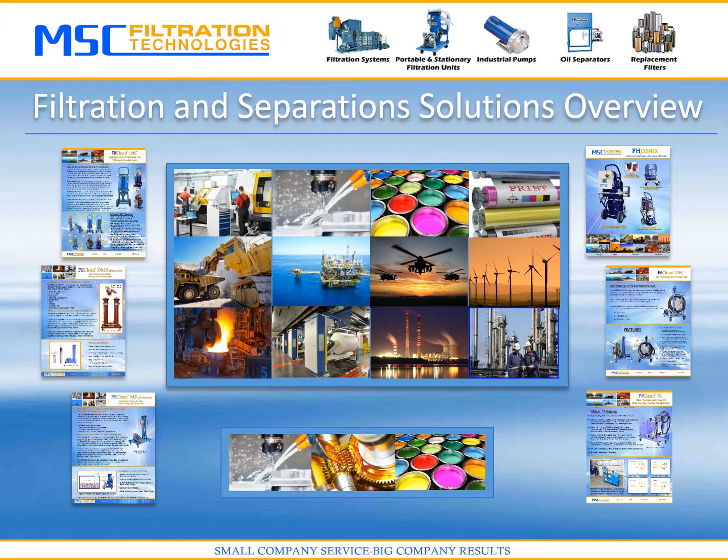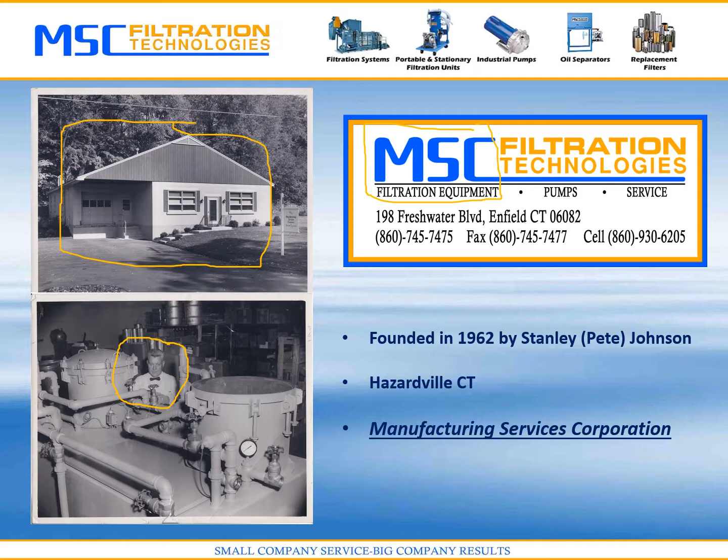Our company was founded in 1962 by Stanley Pete Johnson, and our original office was located in Hazardville, Connecticut. The original name of the company was Manufacturing Services Corporation, and that is what the MSC stands for in MSC Filtration Technologies today.

Today we're located in Enfield, Connecticut in an 8,200 square foot building where we manufacture, warehouse, sell, and engineer our products.

MSC designs, engineers, and manufactures a variety of fluid filtration and handling equipment for a variety of applications and industries. The primary industries we sell to are machine tool, lube and hydraulics, and process industries. Our products reduce waste, improve fluid cleanliness, increase equipment reliability, and improve working conditions.

On the left, you'll see some of our standard offerings, which include our FilClean line of filter carts, which can be used in a whole host of different industries and applications. Our Tramp oil separator, which is primarily used in the machine tool industry for removing oil from machine tool coolant.

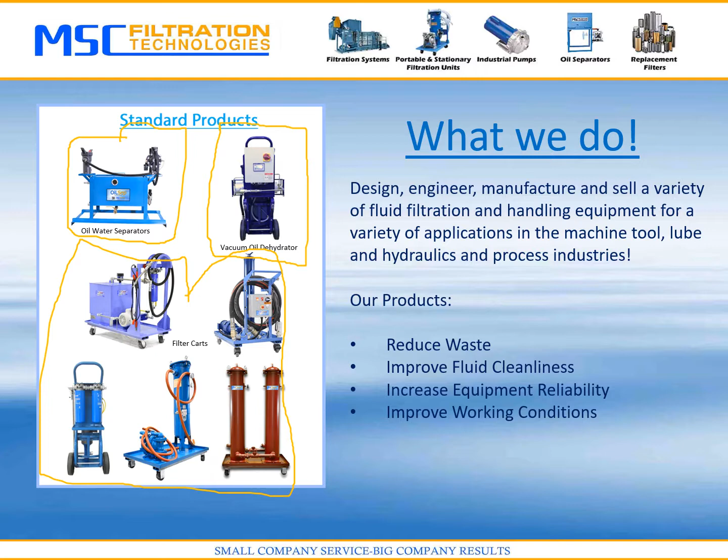And also our Phoenix membrane vacuum oil dehydrator, which is primarily used in the lubrication and hydraulic market for removing water from contaminated oil systems. This is built exclusively by MSC Filtration Technologies.

In addition to our own product lines, MSC also represents and distributes a variety of complementary fluid handling and filtration product lines, including industrial fluid chillers, fluid pumps, vacuum systems, and magnetic filters.

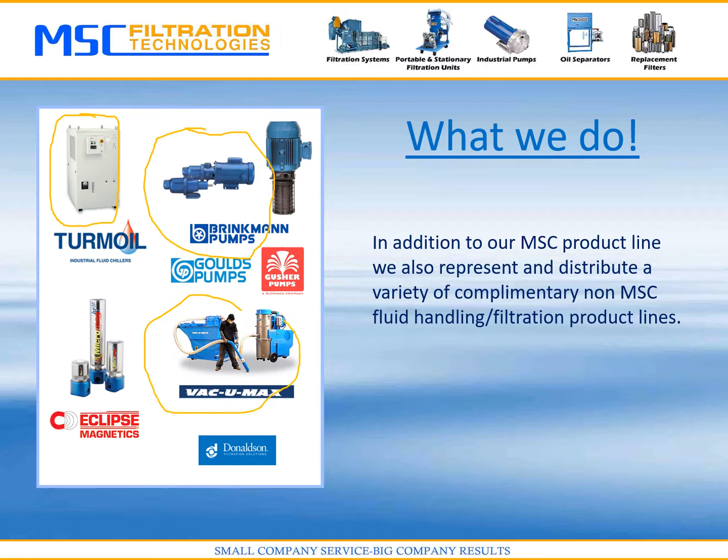With over 50 years of fluid filtration and handling experience, and because we supply and distribute other non-MSC complementary filtration and handling products, we're actually able to integrate the best product into one single customer-centric solution based on our customer's requirement, budget, and available footprint.

For instance, on the left, you'll see a system which is a centralized coolant filtration system for a machine shop that has multiple machines. The machines are putting out both ferric magnetic particles and also non-magnetic particles.

We have integrated a rotating drum magnetic filter where multiple machines pump their coolant into to remove ferric particles. Then the coolant goes down into a gravity bed filter for non-ferric particles and then drops into a storage tank. It is then pumped back out through some fluid pumps that we also represent.

So one single filtration machine for our customers versus them having to go out and get multiple different solutions for their problem. On the bottom, you'll see another system, which is also a coolant filtration system.

In this case, the customer required not only coolant that met a certain cleanliness, but also one that maintained a certain temperature. So what we did was integrate a coolant chiller, a drop-in chiller, into a tank along with some disposable filter media and coolant pumps.

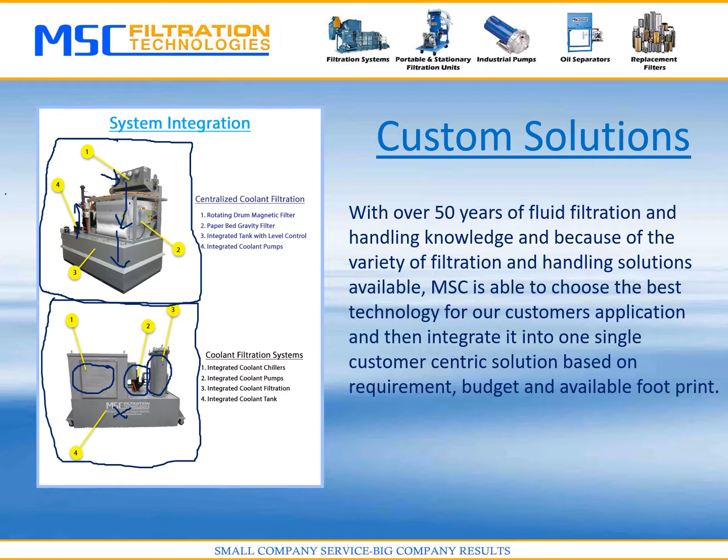So this met a specific footprint for the customer where this particular filtration system can be wheeled up to a machining center. The coolant drops into it and then is pumped right back out to their machine for lubricating their tooling and also cooling their parts.

MSC's metalworking solutions are primarily sold to machine shops and machine tool manufacturers. Our primary goal on the machine tool coolant side is to keep their coolant looking like this rather than this.

The reason being is that contaminant that gets into this particular coolant, which can wash off the part or come from chips and particulate due to the machining process, can cause wear and tear on the customer's machine tool, which can be fairly expensive to replace if it breaks.

It can also affect the finish of the part and also cause the customer to have to shut their machine down, and when it's not running, it's not making any money, to change coolant prematurely, which can take several hours in some cases. In addition, there's a cost of buying new coolant that might not necessarily need to be replaced if you can keep it clean.

It also affects the work environment because it can start to smell and also can cause dermatological issues for operators of the machines themselves.

So MSC has a variety of ways of tackling those kind of problems, and it basically depends on the machining type, the type of machine, the type of coolant being used.

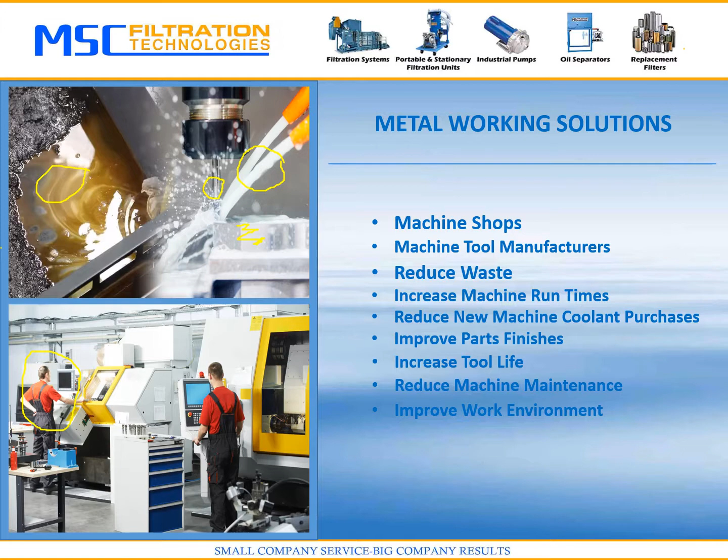But in some cases, we can extend the life of our customers' coolants indefinitely, and they only need to replace the coolant via makeup because of losses, because of spills, or because of drag out from the parts waste.

So here is a map of a machine shop of most of the products that MSC sells to the metalworking industry, and I'll actually be covering most of them in this presentation. But if there's an excellent map on our website, if you are ever interested in taking a look at a machine shop and trying to find the exact product and where it's located, typically in a machine shop.

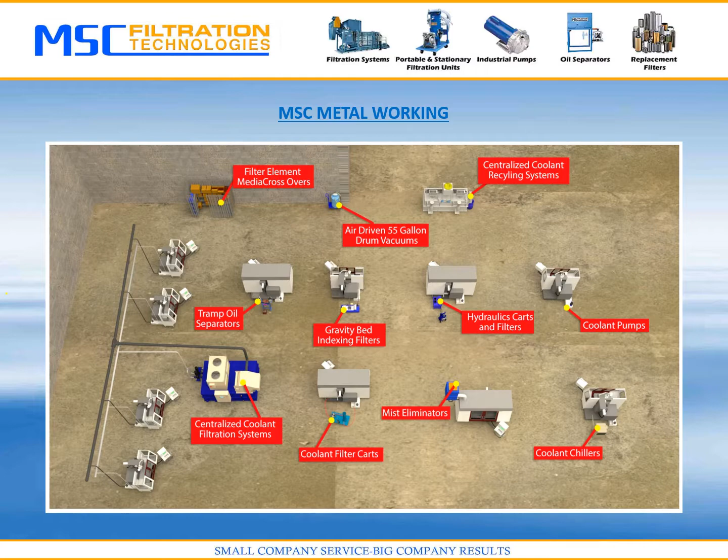So the first MSC product for metalworking solutions I'll talk about is our Tramp oil separator. Tramp oils are oils that coat metal parts. The raw metal comes in with oil on it, and when the water-based coolant is washing over it, that oil can be washed off into the coolant and build up in the whole machine coolant sump. In addition, on some older machines, hydraulic leaks can occur, where hydraulic oil can actually leak into the coolant and also build up.

Either of those types of oils, if they're not separated out of the coolant and removed, will build up over time and cause bacterial growth, foul-smelling odors, and dermatological issues for workers, where if they touch the coolant, they can start to break out. It also leads to short coolant life, meaning the customer will need to bring the machine down, which can take literally hours sometimes to clean the machine out because they need to flush the whole coolant supply system to make sure there's no bacteria or oil left in the system.

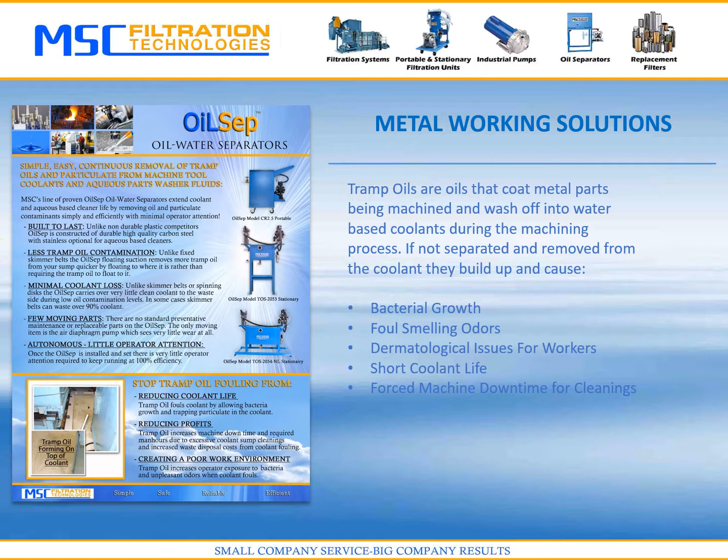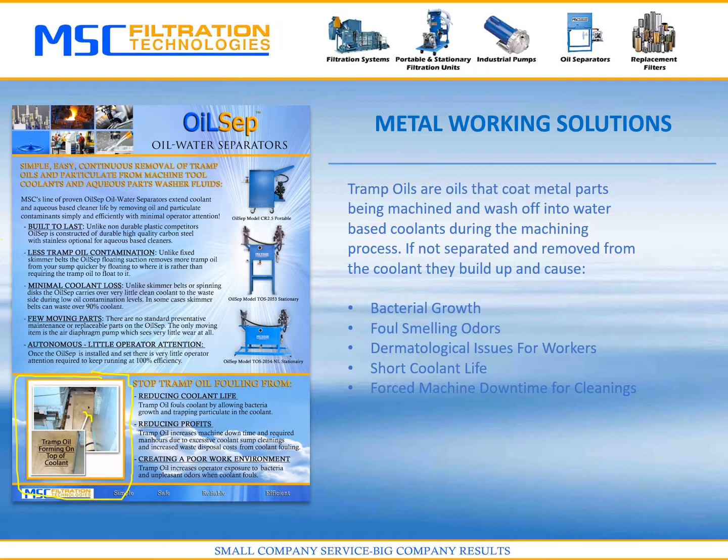So the Tramp oil separator helps prevent that. Over here on the left, you can see some Tramp oil forming on top of the coolant, this brown material that floats to the top because the coolant is water-based. Tramp oil is oil, and oil floats to the top, and that is how we separate it out and remove it from the coolant.

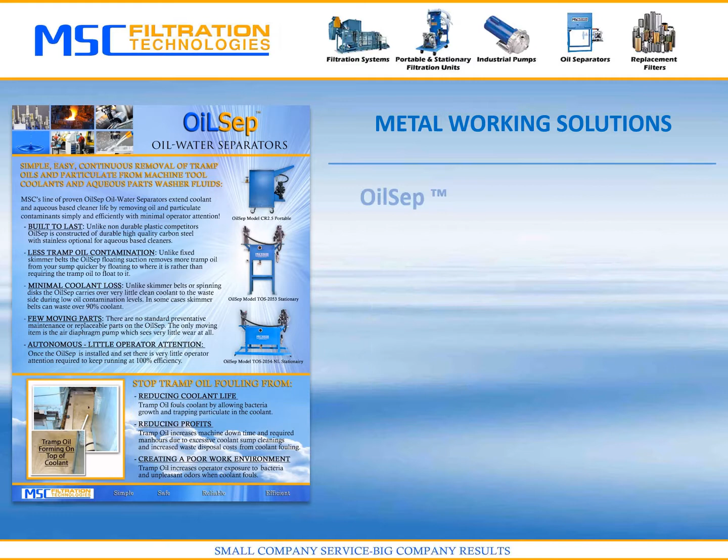Now, the OilSep has been around for a while. MSC has been building them for a long time and has thousands of these in the field. It's very simple to use, with very few moving parts, very few consumables, and very high quality, durable construction. There are more inexpensive plastic versions of these on the market, but they are not nearly as durable as the OilSep that we make.

And it works significantly better than oil skimmers for a variety of reasons. We have a very good video online on our website that will review the benefits of our technology versus the standard technology that's on the market today.

It has very little coolant carryover, meaning there's very little coolant waste associated with this. The customer throws out 90 to 95% Tramp oil, and the coolant remains on the machine. It's available in permanent installations and also portable models, where it can be moved from machine to machine to remove Tramp oil that's built up.

The process of separating out the Tramp oil is also very easy on the coolant. It does not affect the chemistry of the coolant at all, so you can run these indefinitely and not worry about stripping out any additives that might be in the coolant, like you might with a centrifuge or something else.

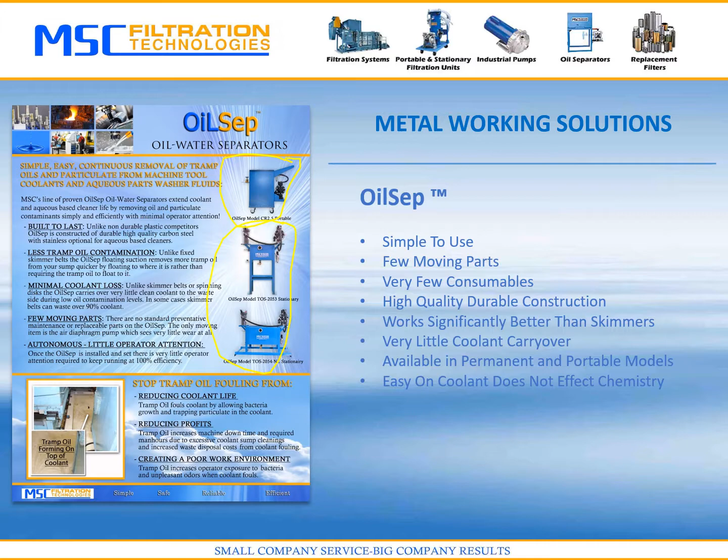So we have a floating suction on the Tramp oil that has floats on it, and we pull the coolant into this floating suction into our Tramp oil separator. We're only removing the top one inch of coolant from the machine tool sump. The coolant is then pumped into the Tramp oil separator and goes through three different stages, three different sections.

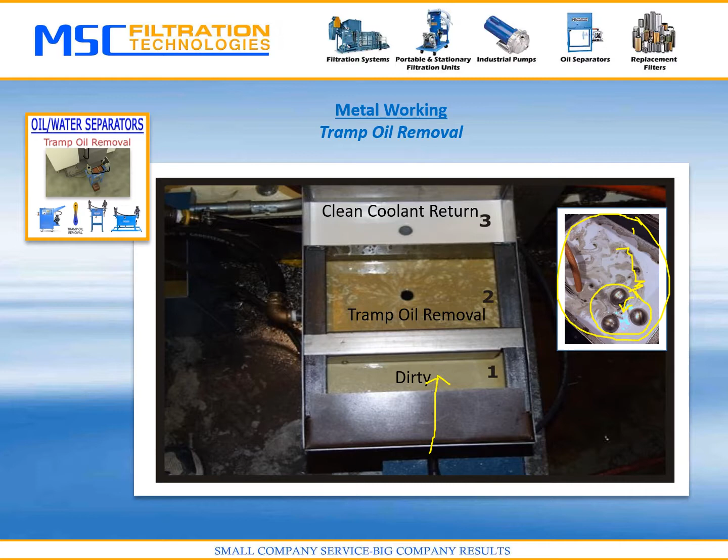Here is your dirty section, where you can see basically a blend of Tramp oil and coolant coming into our system. Then there's the separation stage, where Tramp oil is being separated out of the coolant. It floats to the top of the coolant and drops over a drain for disposal.

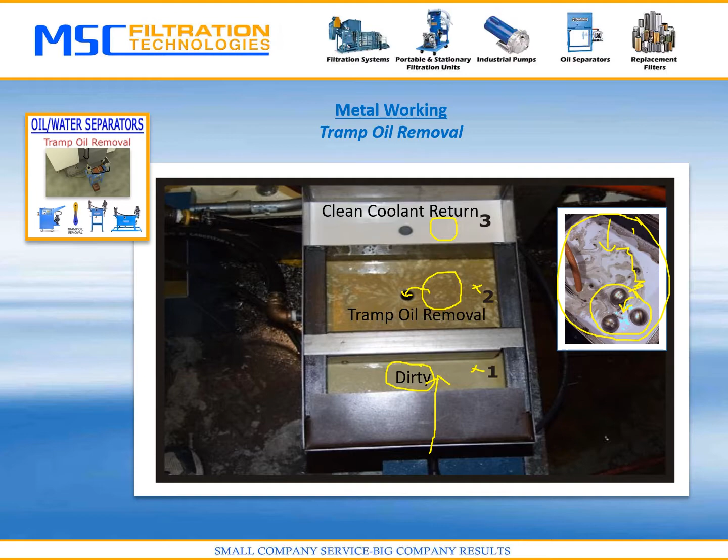This will actually drop off, and the customer can open that drain up and drain off the Tramp oil occasionally into a bucket or collection vessel for disposal. Then over here is the clean coolant return side, which continually gravity feeds back to the coolant sump. You can see the effectiveness of the Tramp oil separator here, with the dirty side, the separation side, and how clean it actually is returning back to the sump.

So we don't allow any Tramp oil to really form in this sump, since it's continually being brought to the floating suction and pumped into our Tramp oil separator. This is unlike, for instance, a skimmer, which sits in just one spot of the sump, and the Tramp oil has to basically float to it to get removed. So you can actually get a buildup of a lot of Tramp oil in there before it's actually removed.

In our case, we're actually pumping the Tramp oil into our system. It goes through either a fairly inexpensive disposable filter, or in this case a strainer basket to protect our pump from any chips that might get in, then through an air diaphragm pump and into our system. The air diaphragm pump has a flow control valve, and our system comes with everything needed for hookup, including an air regulator, air filter, and also an air flow control valve for the pump.

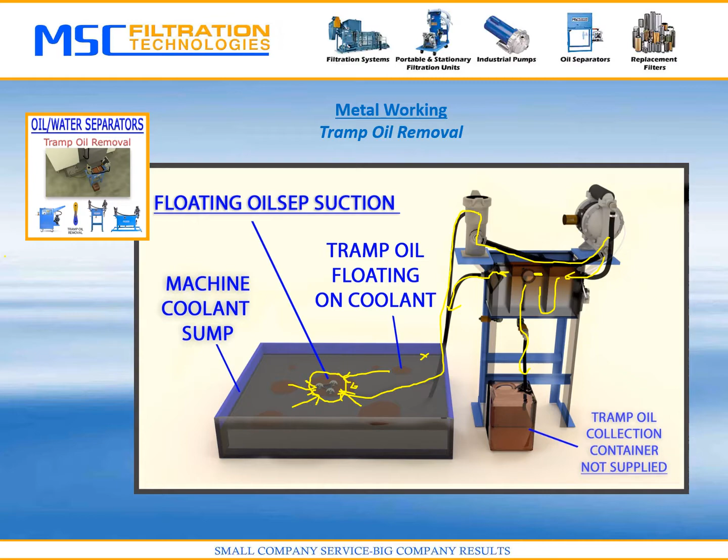The next product I'll talk about is our FilClean line of filter carts for the metalworking industry.

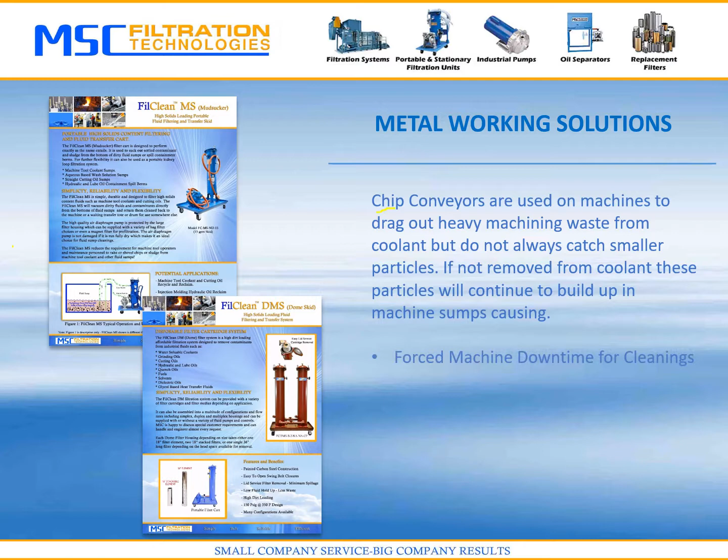In most cases, most machine shops have a chip conveyor that sits under the machine, where coolant and chips from the machining process fall, and the chip conveyor drags out that waste before the coolant is reintroduced down into the sump of the machine for reuse, to be pumped back out and used again in the machining process.

What happens, though, in a lot of cases, is chip conveyors don't catch all the particulate that the machining process generates, and you end up with smaller particles of machining waste and chips falling back into the sump. Since it's continually kidney-looped around the machine tool, those will eventually build up in the sump and in the coolant. That can cause a whole host of problems, from pump failures to pump clogging to poor parts finishes. As these particulates build up in the coolant, they can actually start to affect the parts finish, including shortened machine tool life as well.

The machine tools could potentially overheat and break because that can cause friction, and also shortened coolant life, where you get into the same situation as Tramp oil, where you have to take the machine down to throw away your coolant, buy new coolant, and clean the whole system out, which takes time.

So MSC builds a couple of different filter carts for different machining applications. One is the FilClean MS Mudsucker, which tends to be used on heavier machining applications and chips. In a lot of cases, for instance aluminum, which can build up in a machine tool sump and both float and sink.

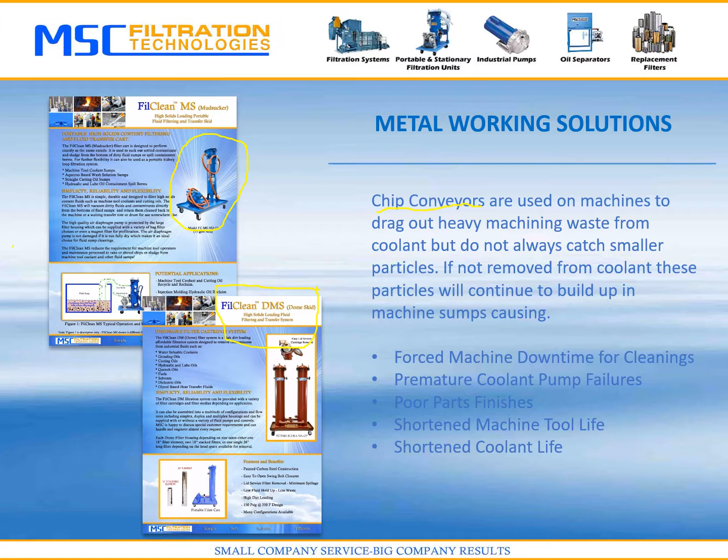The other filter cart system we make is our FilClean Dome, or DMS skid, which is primarily made for grinding applications. It works similarly, where you put the suction and return hose into the sump of the machine, but grinding applications tend to have much finer particles than heavy machining applications. In this case, we use our Dome cartridge filters, pumping the oil through these cartridges to keep the machine tool coolant clean.

Over time, aluminum can tend to float on top of the coolant, and it also sinks to the bottom of the sumps. As it builds up, it can start to cause problems with coolant pumps because they can plug, or it can plug hoses in the coolant distribution, and also affect the parts finish of the machining process.

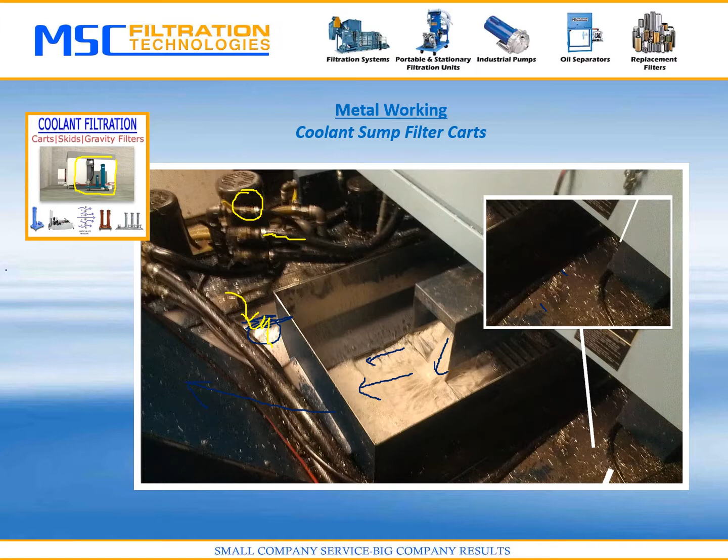That is what the FilClean MS Mudsucker and the FilClean Dome are, except the Dome does that primarily for grinding applications versus machining applications.

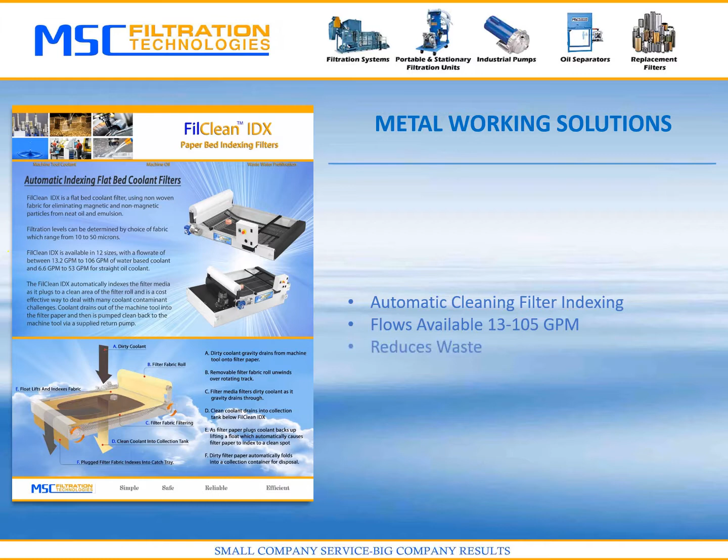The next product I'll talk about is our FilClean IDX, which is an indexing, gravity-fed indexing filter. This would be used on a machining process primarily where there are a lot of contaminants, and disposable filtration isn't really an option.

The way these work is you have a roll of filter media, and the coolant gravity feeds out of the machine into the IDX. As it goes down across the filter media, your particulate builds up, and as it builds up on the media, your coolant starts to back up as it gets restricted.

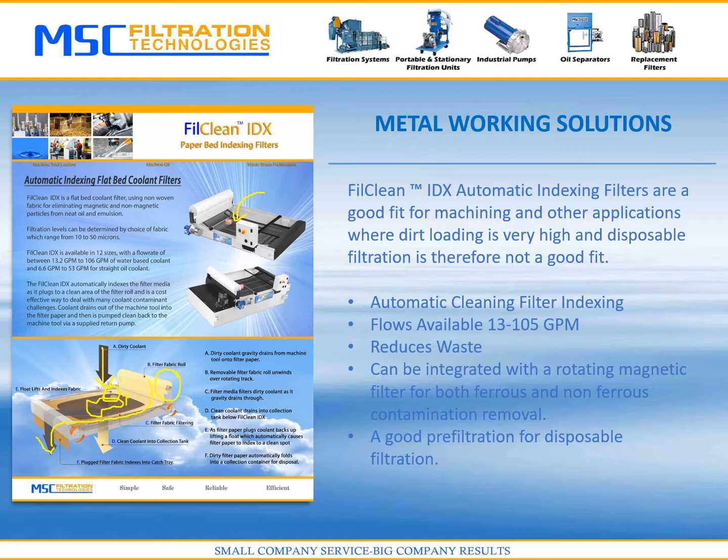When it backs up, there's a float or some electrical probes that the coolant will contact and lift. When it does, the roll media will index off the machine into a container, to a clean spot, and it will just continue to do that.

The benefit of this technology, which has been around a while, is that roll media is very inexpensive, and you end up with an automatic compressed pack of filter media and machined waste that is easy to dispose of.

This can be used on both grinding and regular machine applications, set next to a coolant sump with the material sent back to the sump. Flows are available from 13 to 105 gallons per minute, and it significantly reduces waste.

We can also install a rotating magnetic filter here, not actually shown, so that coolant comes in and goes through a rotating drum magnetic filter to remove iron particles first, which comes out as a dry cake. Then the regular coolant goes down into the paper bed filter for final polishing.

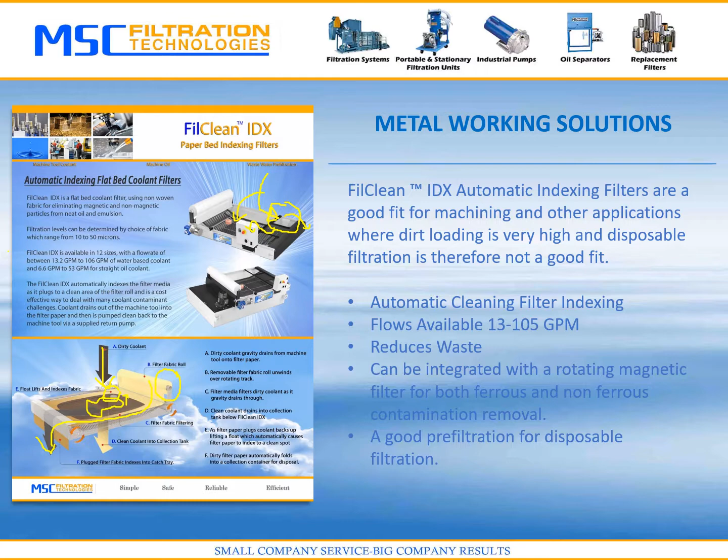So it can be incorporated with a grinder, a magnetic filter, and a paper bed filter, and is very economical to operate once it's installed.

So we have the capability at MSC to build the correct solution for the customer, to make sure it's the most economical and easy solution for them to use.

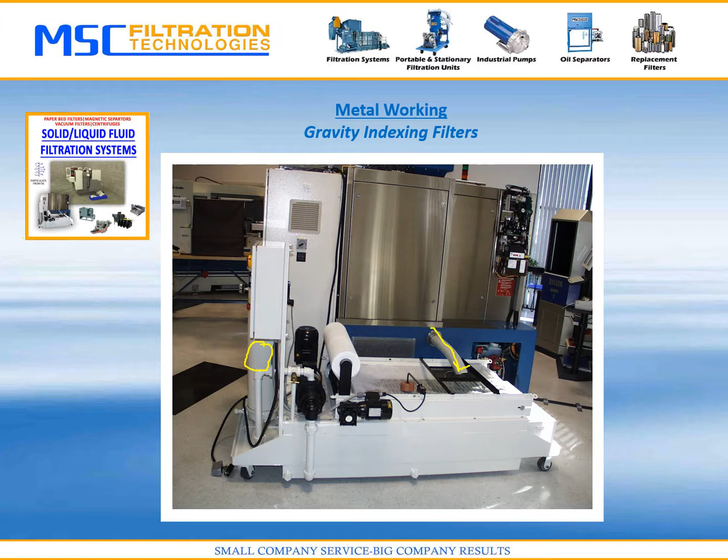And the next product is our FilClean CR Coolant Recycling line. We are able to, with our coolant recyclers, in many cases extend the life of our customers' coolants indefinitely.

The way we work with our customers to recycle their coolant so it can be reused indefinitely is we partner with them. It's not just a matter of selling equipment. It's also working with them to maintain correct chemistry while they're recycling and taking care of their coolant correctly. So we think of this as a partnership between us, the management at the facility that wants to recycle, and also the customer's coolant supplier, who all need to be involved for a good, effective recycling program.

We make both a 3-tank recycler design, which can handle up to about 1,200 gallons of coolant per day, and for smaller shops, a smaller 2-tank recycler. There's an excellent video on our website about the whole recycling process, how it works, and what we recommend, which is great for anybody who wants to learn about the process. It's about 13 minutes long, but it's fairly in depth as to how the whole process works.

In the right situation, it's got an amazing return on investment, in some cases 6 months. It's not very difficult to do, so it's a fairly simple operation. And again, it provides all the same benefits: keeping your coolant clean, reduced machine tool downtime, reduced environmental footprint, increased tool life, improved parts finishes, and improved work environment. So there are a lot of benefits to recycling coolant on site.

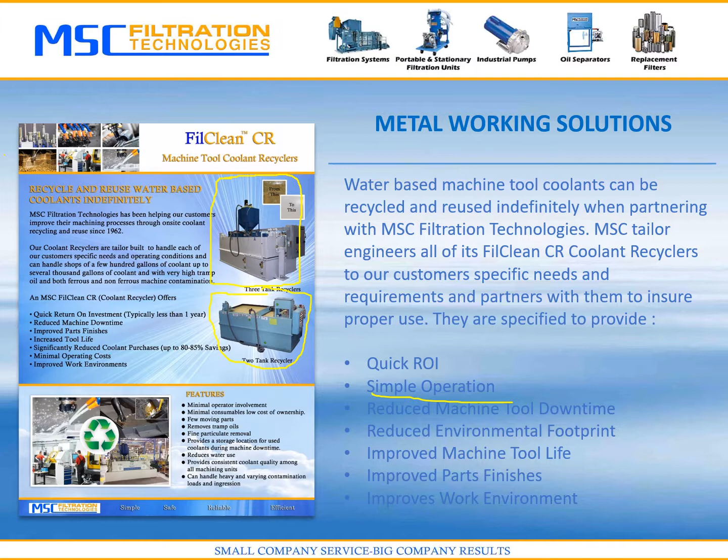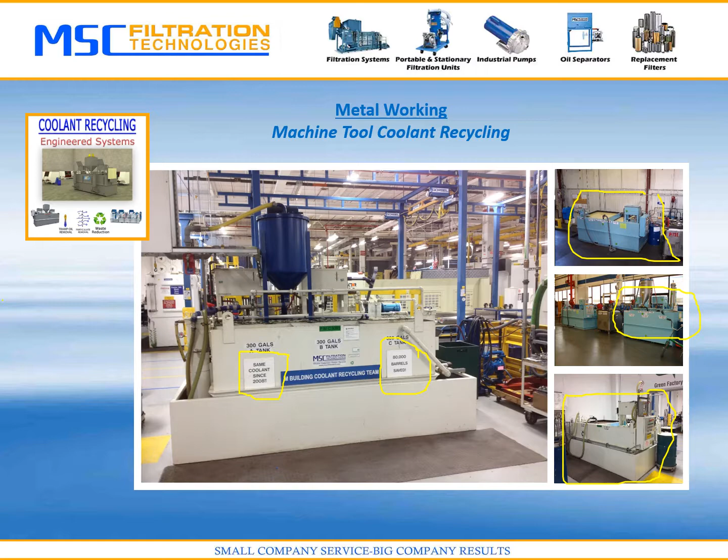Again, we have a very good video online to go over the whole process, which I would recommend you take a look at if you're interested in learning more about recycling itself.

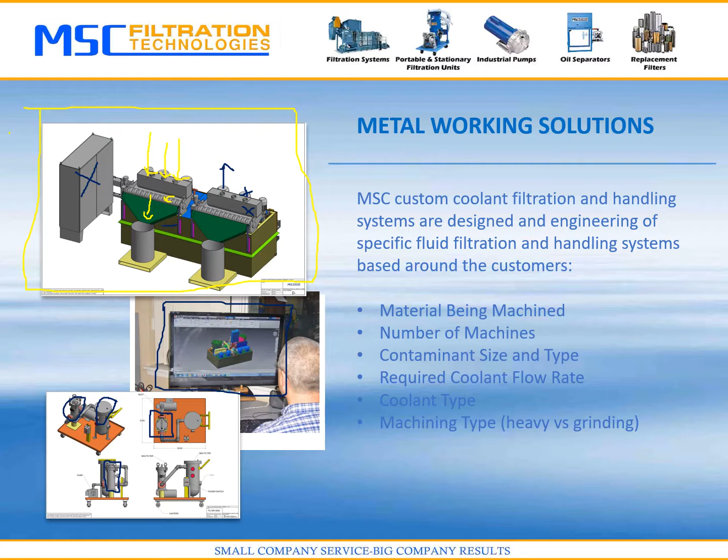So here are a couple of systems in our custom coolant filtration area. When I talk about custom coolant filtration, it can be one single filtration system for a specific machine tool, or it can be a specific centralized system for multiple machines, like up here in this photo, where you've got multiple machining centers all feeding into one pipe that sends their coolant over into our machine.

The material is filtered and chilled to a certain temperature and then pumped back to each machine through a separate pipe header that you see up here. So in many cases, we can design an entire filtration system, either a single system for one machine shop or multiple machines, or a single filtration system for one specific machine that might be having issues.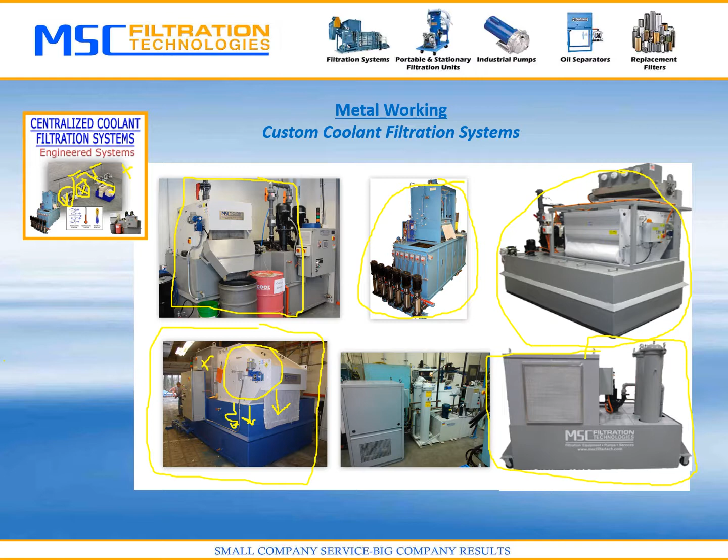Here's the single machine system for the specific grinding machine that I had talked about earlier. And here's another system that we designed specifically for a machine tool application to keep their particular coolant clean.

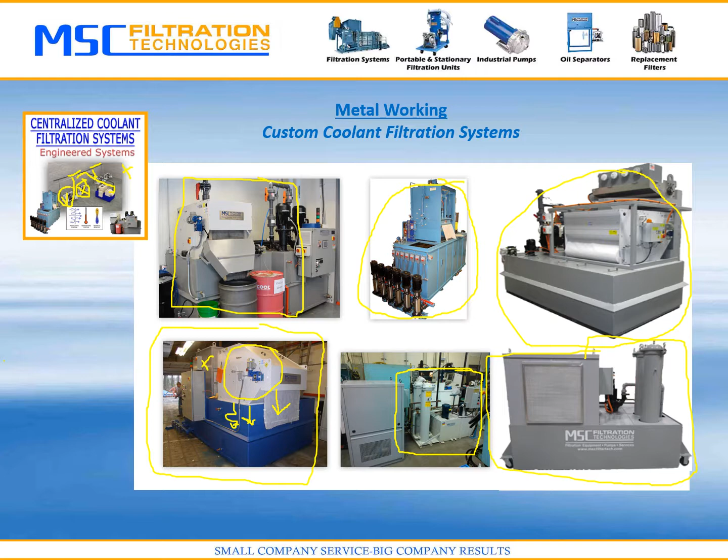So if you don't see on our website exactly what you're looking for, you can certainly just ask the customer what they're trying to achieve, and in most cases we can come up with a solution for them.

Now I'll get into our lubrication and hydraulic solutions, which covers a whole variety of different industries. We've sold to paper, power, chemical, mining, marine, onshore and offshore oil rigs, refineries, and road machinery.

The primary focus is filtration and keeping lubrication, hydraulic systems, and gearboxes reliable by keeping their lubrication clean. The cleaner you can keep lubrication, the longer you'll keep your bearings, gears, and hydraulic systems from failing. That's our main goal here.

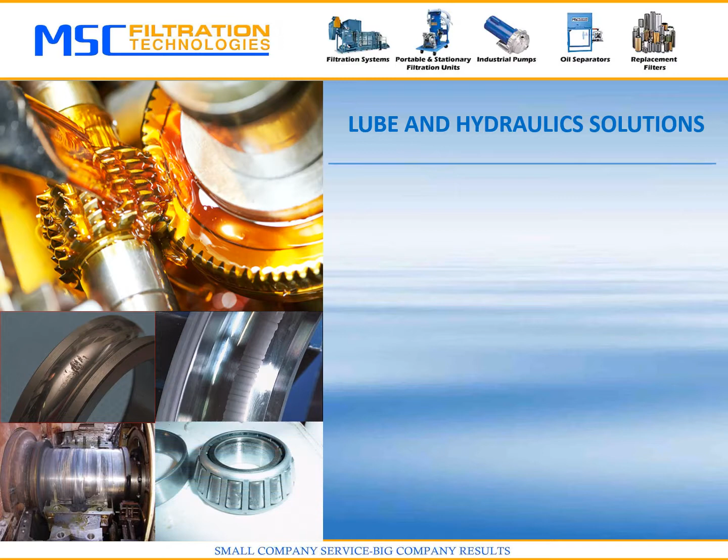Over here on the left, you'll actually see some damage caused by lubricating oil. Here's a bearing that has been damaged by particulate over time.

We have a pretty good video online called Water and Particulate in Lubrication and Hydraulic Oil, What's All the Fuss About, which goes into the types of damage that particulate and water contamination in lubricating oil can cause these systems. It's fairly in-depth, about 14 minutes long, but it'll make you an expert on lubricating and hydraulic oil and why it should be kept as clean and dry as possible.

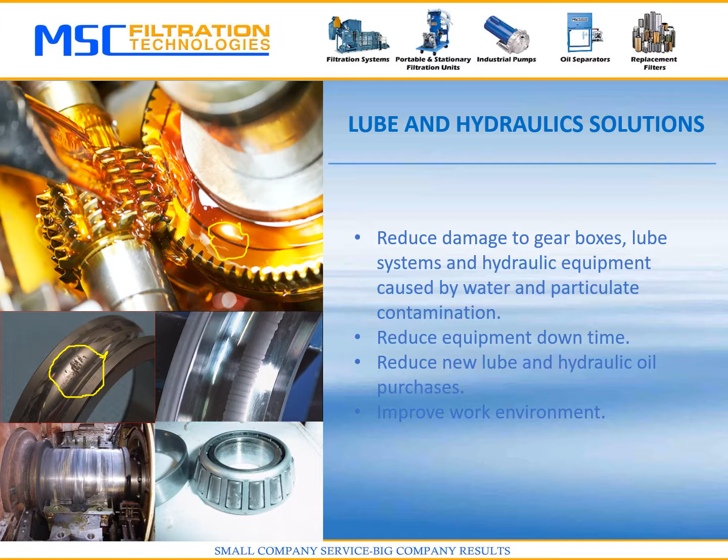Our job is to reduce the damage to gearboxes, lube systems, and hydraulic equipment caused by water and particulate contamination, and then reduce equipment downtime, reduce the purchase of new lube and hydraulic oil, and improve the work environment of our customers. We have a couple of unique products to do that.

So the first product I'll talk about in our lube and hydraulic solution line is our Phoenix membrane vacuum oil dehydrator and purifier, which is the world's first commercialized portable membrane oil vacuum dehydrator put on the market. It's exclusively built by MSC Filtration Technologies, so it sets us apart from a lot of companies in oil dehydration for lube and hydraulics.

What it does is it removes 100% free water, 100% emulsified water, and dissolved water from contaminated gearboxes and other lube and hydraulic oil reservoirs. These systems can get contaminated with not just particulate, but also water from things like cooler leaks. A lot of customers use water coolers to cool the oil because it generates heat, and sometimes those leak, or water gets in from the atmosphere, or in lubrication systems there are steam seals between the bearings, and sometimes steam can get through the bearing into the lubricating oil. So water can ingress into these lube and hydraulic systems from a variety of areas and cause quite a few problems for customers.

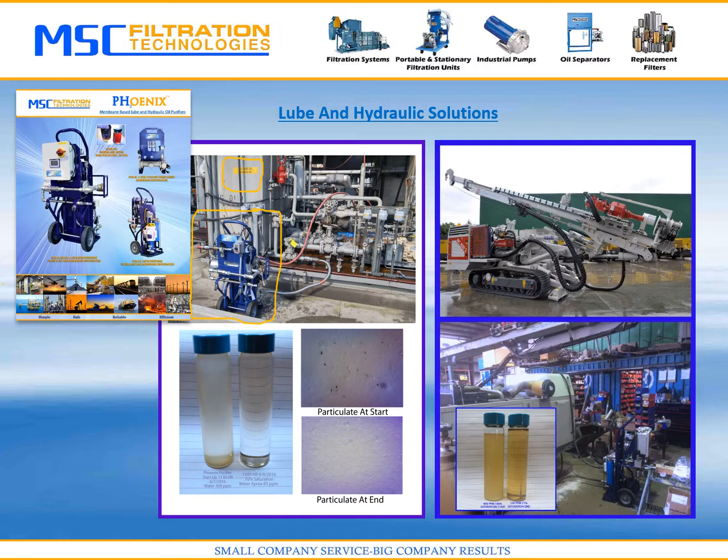What happened is the customer got a seal leak where moisture got in through one of the seals into this oil reservoir and contaminated it. If it wasn't taken care of, they would either have to throw away 700 gallons of oil, which is costly, dispose of it and buy new oil, or live with the problem and end up with a bearing failure, leaving a piece of very critical equipment at the refinery not working and requiring repair. So we put this on, and it basically is kidney looping oil, bringing oil out of this reservoir and pumping it back in.

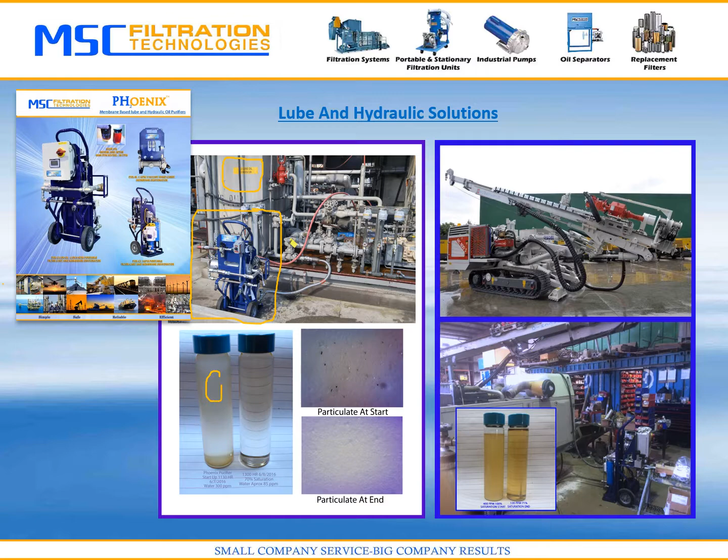This is what the oil looked like when we started, and this is what the particulate looked like when we started - it was fairly dirty. When we had it hooked up for about a day or two, this is what the oil looked like after we were done, and this is what the particulate looked like after we were done. So they basically put this on, let it run, and we saved 700 gallons of oil.

Over here is a different application - a drilling rig at a rental company that rents road construction equipment. This is a drilling rig for pylons, drilling holes for driving pylons into the ground. What happened here is our customer rented it to their customer, and a brick got accidentally dropped onto the top of their main oil reservoir, about 150 gallons, and cracked it.

As it sat outside and the customer was using it, rainwater got into this hydraulic reservoir and contaminated it. The big problem is that all these pistons here, and pistons here, and pistons here, are all fed from this hydraulic oil reservoir. So all that water, that hot, poor quality oil and water, got pumped throughout all these systems and hoses and all throughout the machine.

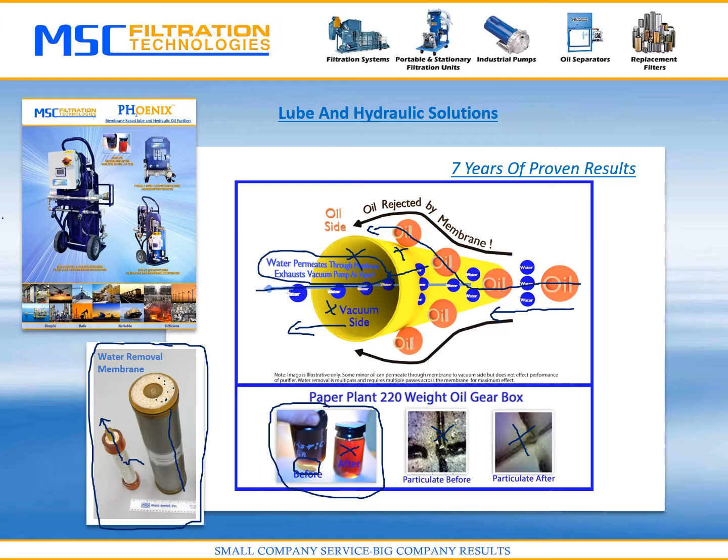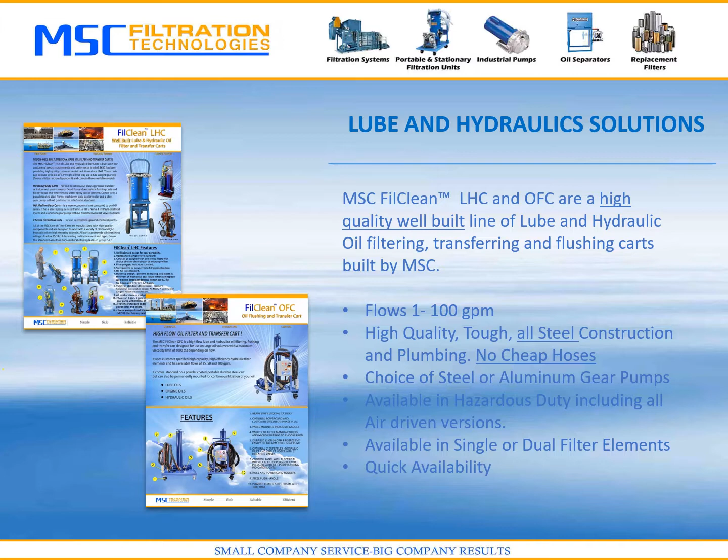So the next product line I'll discuss is our line of lube and hydraulic oil filtering carts, which are primarily used to transfer, filter, or kidney loop oil out of equipment such as gearboxes or other lube and hydraulic systems.

We make two different models. One is our LHC model, which is our two-wheeled cart, available in 1, 5, and 10 gallons per minute. You can get one or two filters with this cart. One filter could be a water absorbing filter followed by a particulate filter, or a larger micron pre-filter followed by a tighter particulate filter.

These are very well-built carts. There are a lot of inexpensive, cheaper carts on the market. We build a cart meant for areas where they're going to get banged around, moved around - service companies where they take the carts outside, use them in driving rain or other tough areas, and paper plants where there's a lot of moisture or just a lot of rough handling.

The plumbing of the cart is steel. You'll find other carts out there that have plastic tubing or hoses as supply tubing to the filters. Ours are all hard piped. Every cart has filter plugged indicators and upstream oil sample valves.

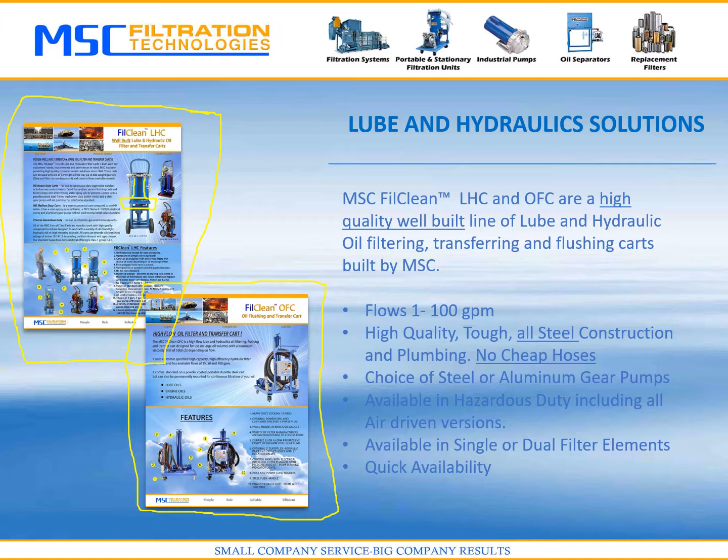So the next product in our lube and hydraulic solutions area is our FilClean TK portable tank filter cart. This allows customers to store, pump, and filter oil in one cart versus having to move, say, a 55-gallon drum of oil around to different locations. You're able to pump oil into this tank and either kidney loop the oil and filter it in this tank, or transfer it back out into a different oil reservoir.

It comes in 25, 50, and 100-gallon tank designs, 1, 5, and 10-gallon per minute versions. It's all steel construction, just like our LHC and OFC, very durable. We use JIC fittings again as much as possible over NPT fittings for leak resistance. Just like our LHC carts, you can get 1 or 2 filters installed on these.

It's an excellent cart for customers that do work on transportation or road equipment in maintenance facilities, where they need to drain engines of oil, maybe filter that oil and put it back into their systems, either engine oil or hydraulic oil, or in one case we made this for antifreeze, where the customer can recycle and refill antifreeze for road construction equipment.

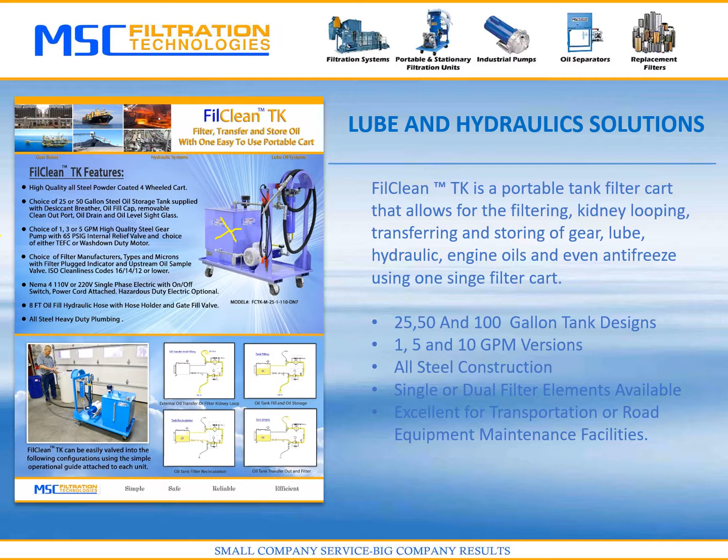This slide shows how the FilClean TK can be configured for different oil filtering or transferring jobs. It's an excellent cart for customers doing work on equipment. For instance, if a customer was working on a gearbox and wanted to pull the oil out of the gearbox or lube system without throwing it away, they could pull that oil into the FilClean TK, filter it, and once done working on that gearbox or lube system, pump the oil back in to continue using it. The FilClean TK ensures that oil will be well filtered and clean before it goes back into the customer's equipment.

Oil transferring and filtering is one configuration - if you had a 55-gallon drum of oil and wanted to pump it into a piece of equipment, you could configure the valving on the TK with some three-way valves, and it will pump out through our particulate filter and into the customer's equipment to ensure it's filtered. If you want to fill our tank without moving the 55-gallon drum around, you could wheel our cart over to the drum and configure the three-way valving to fill our tank with that oil, so you can wheel it over to whatever equipment you're working on. You can also configure the valving to pump out of the 55-gallon drum or piece of equipment you're working on and into our oil reservoir.

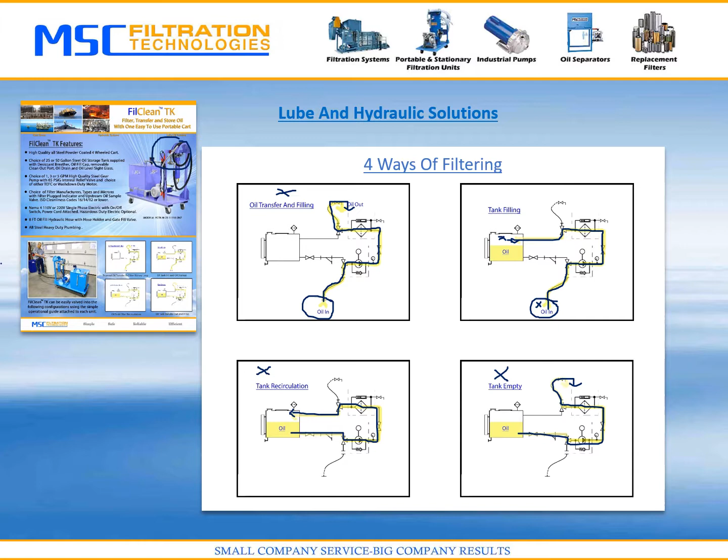The final division I'll talk about is our Process Filtration Solutions division, which is primarily focused on paints, inks, and coatings. We provide filters, filter carts, bag filters, and filter housings for this industry, as well as custom solutions - custom filter carts where they need to filter the coating, which is their product, like paint, printing ink, or adhesives, before it's actually used or coated on whatever substrate or material, or filled before shipping.

As far as filter housings for our bag filter side in the process market, which uses quite a few bag housings and bag filters, we sell our FilClean BHQ line of bag filters. The BHQ is a single round bag housing with a quick clamp removal lid, so you don't need any tools to remove the lid for this particular bag housing.

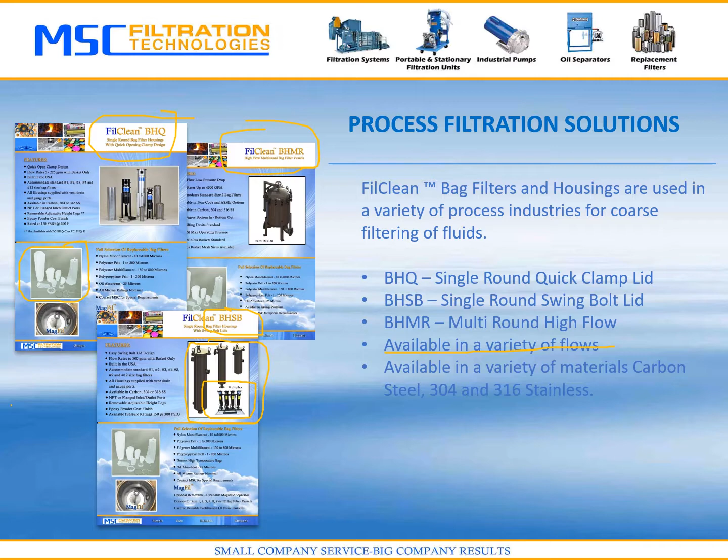But we have the option for either. They're all available in a variety of flows and materials of construction, including carbon steel, 304 and 316 stainless steel, and some are customizable as far as connections, fittings, and different sizes. So if your customer needs a specific fit up of some type, talk to us and we can certainly do that. We can actually put these in parallel, like in this system, providing manifolded bag housings with isolation valves so customers can change their bag filters while they're running their processes.

Besides bag filters, we also sell a variety of cartridge filters. This is our FilClean DM Dome elements, available in a variety of different applications and materials: pleated paper, which is cellulose, used a lot in the machine tool industry; glass fiber dual phase microglass, used in the lube and hydraulics industry; and pleated metal mesh.

We also have an oil adsorbing cartridge and water adsorbing cartridge if we're trying to take some water out of oil. We can configure these housings into a variety of custom filter carts and filter systems, depending on what the customer would like. Since process markets deal with so many different types of fluids, we design based on the fluid flow rate, temperature, and cleanliness level the customer is looking for. So if your customer is looking for a specific type of filtration, just find out the information and give us a call - more than likely it's something we can build for them.

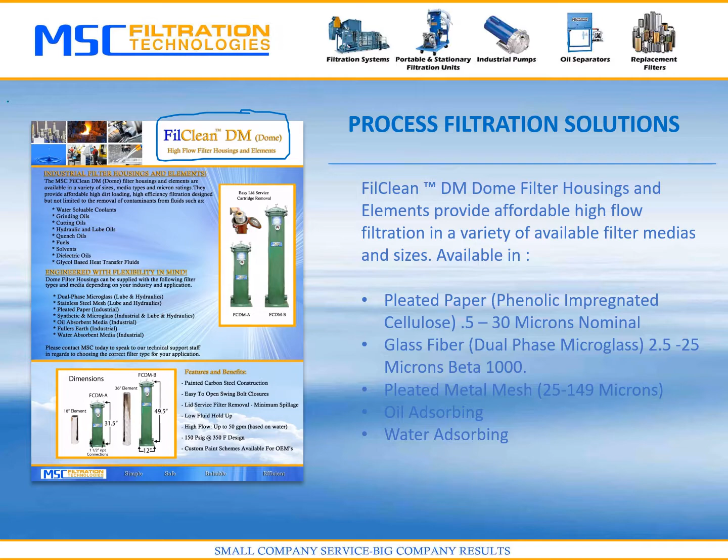So again, an awful lot to talk about, but MSC is a shop dedicated to trying to find the correct solution and engineer the correct solution for the customer. We can usually do these things fairly quickly and without a lot of hassle for the customer. So if they're looking for something in particular, we have an awful lot of experience to try to guide you or your customer towards the correct technology for it.

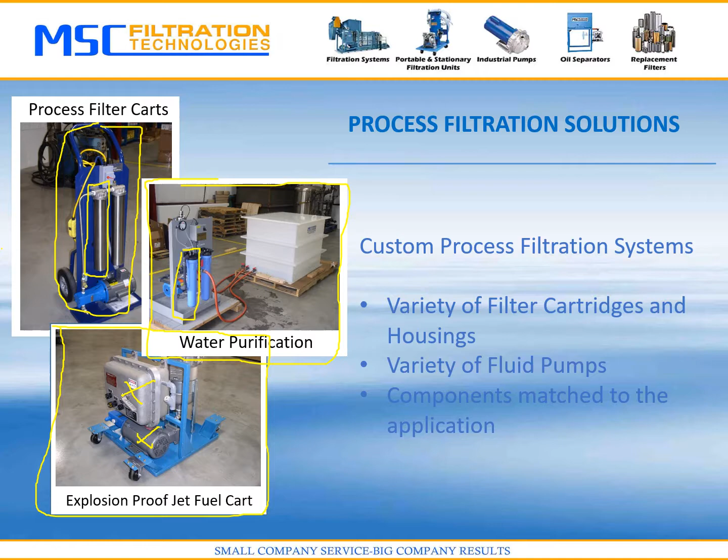So we've come to the end of this video. Thank you for watching. I have covered the three industries that we primarily serve, and most of our products, but not all.